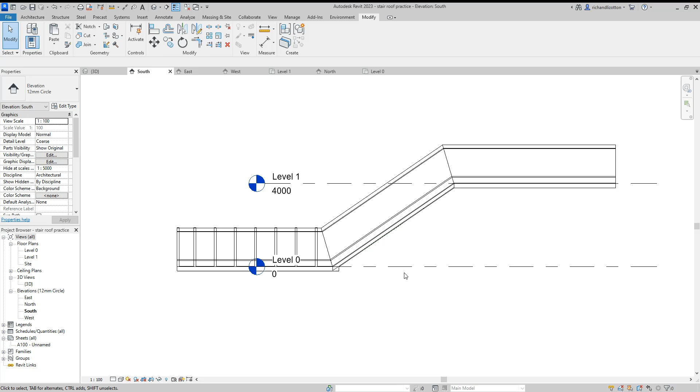Okay, so we're now going to copy or edit in place first of all, and then I'll just highlight a few of these, and I will use the copy command and take it from one level up to the next. All right, so it saves you having to redraw the semicircle extrusion, etc.

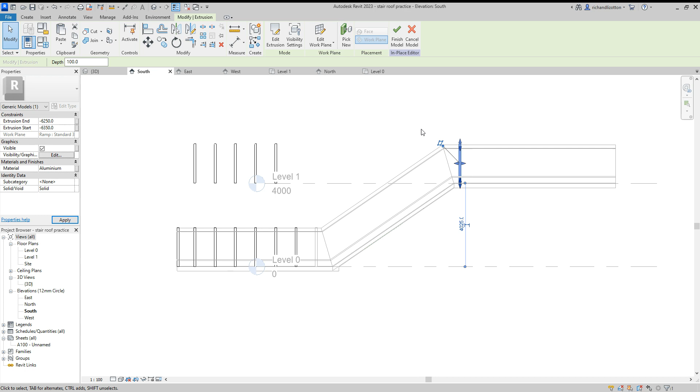And now I will just isolate the first one. I will drag this one across just to get an idea of the position I want it in. All right, and I can see I've got 625, and we'll make that 50 to make it easy. And then this can be 6350. All right, so there we go. There's our first one. And then again, we will just grab each of these ones one in turn.

So I know that was 6250, so it's going to be 7250 and 7350. But on the minus, 7250, minus 7350, and that jumps over there.

And that just fairly quickly, ten 250, and minus 10 350.

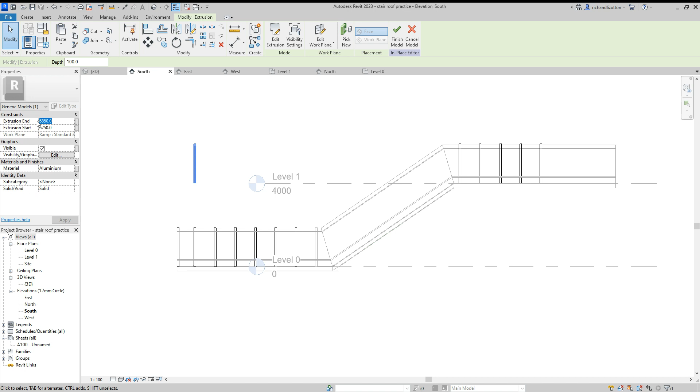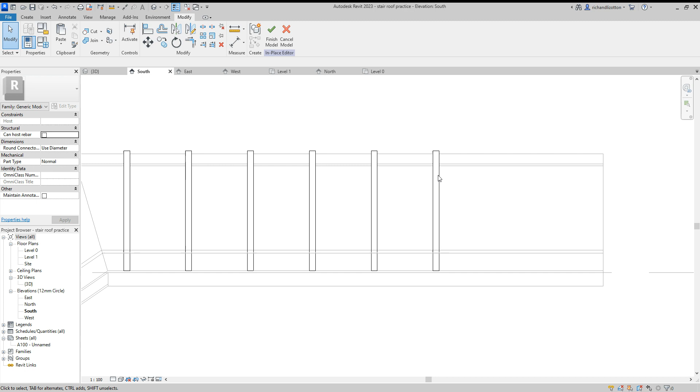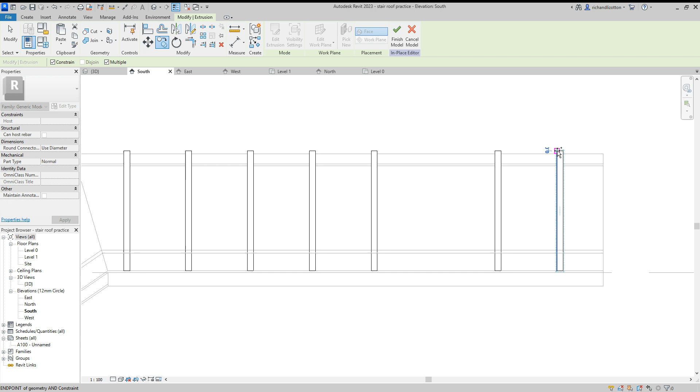And you're getting the idea. And then again, if you need a few more, just do what we did last time. Use the copy command, click there, and then I need, say, I'll do another 2. There we go. And then click on that one, change that one to 12. Click on this one, change it to 13. Oop, accidentally didn't create enough. Click, and change one of them back to 11.

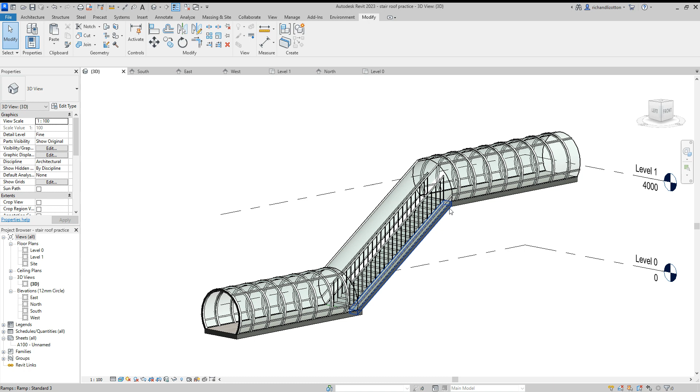Okay, and then we'll finish that model. All right, so looking at that in 3D, we can see we've got pretty good there now. So we've just got one more bit to do, the uprights on that section there. So we'll do that in the final video.